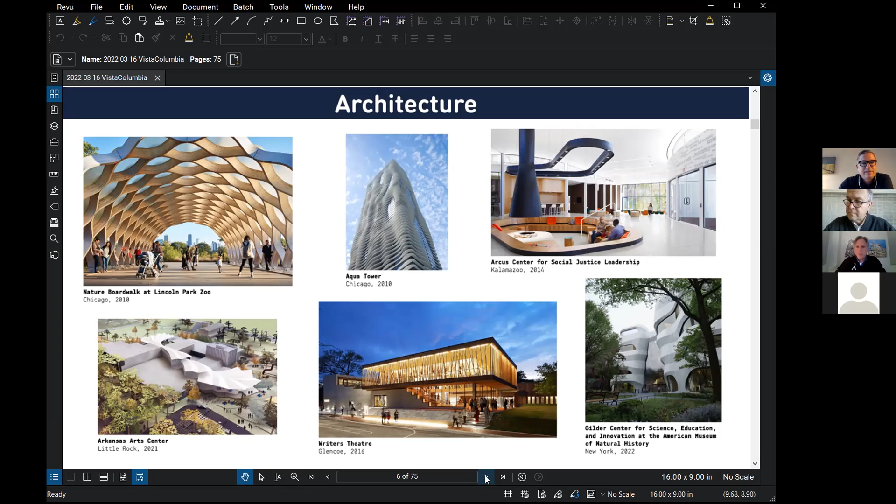And that actually has led to a couple of follow-up projects, such as the Tom Lee Park, which we're working on. And then there's a couple of other architectural projects that some other name firms are working on now that were spurred by those efforts.

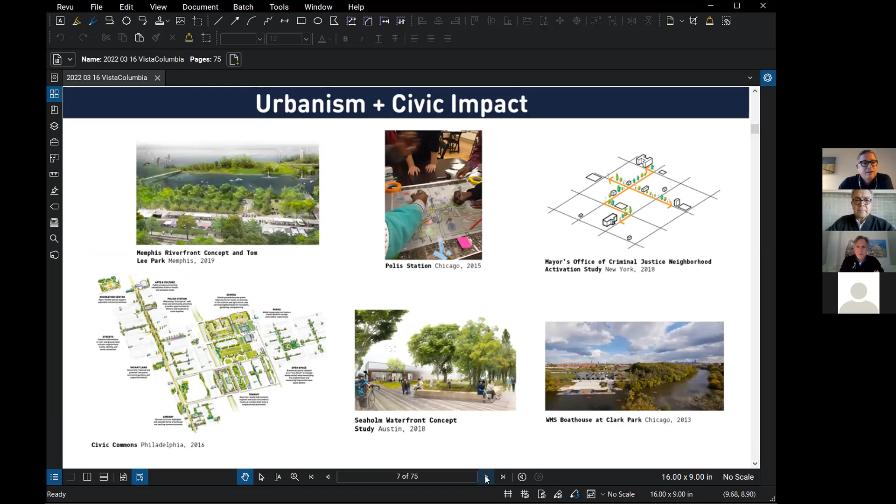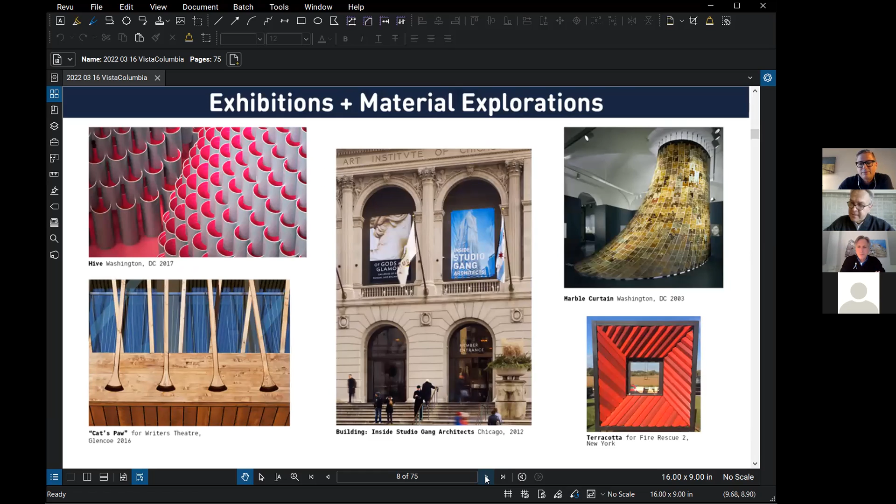And you can see, you might recognize that image on the lower right there, Rick. That's the project that we worked on with you, and some interesting exploration of the terracotta there. Beyond us, we were design lead on the project, but as you can imagine, a project with, I think, 2 million square feet and the height and size that I mentioned before takes a village.

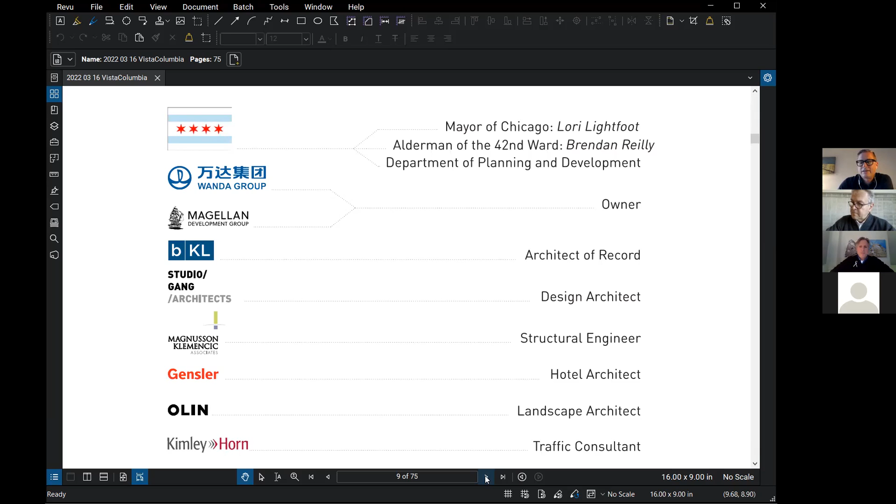There's a lot of people on the team, all of them certainly not even mentioned here, but you can see it's even 3 different architecture firms that were involved here. So lots of coordination, and also feels a little bit like a Chicago thing, is this collaborativeness.

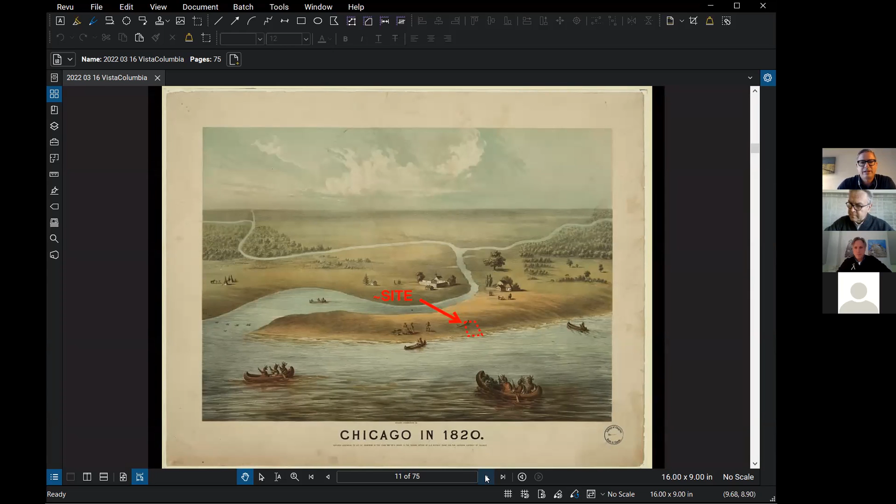All right, diving into the site, it's a very historic site. As you can see, this is about the first depiction of anything in the Chicago area in 1820. Jean-Baptiste DuSable was the first settler, and he didn't know, but our site was pretty close to where he started the entire city, which of course is based around location on the lake and on the river.

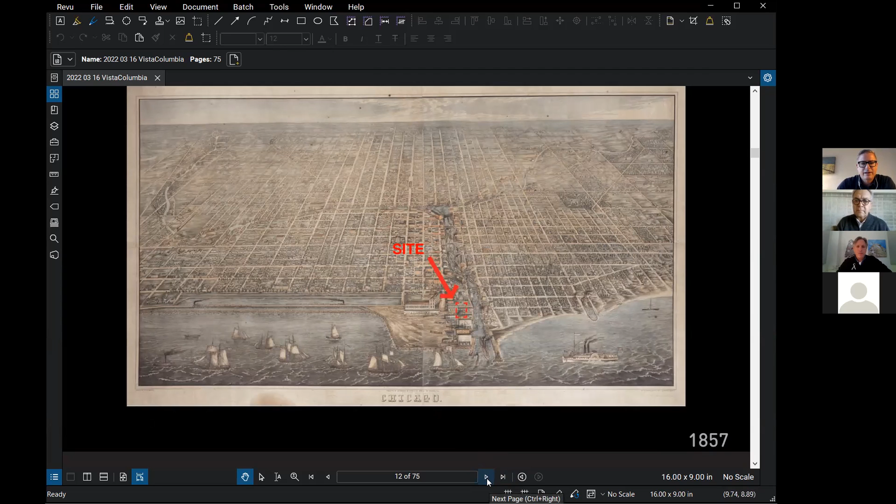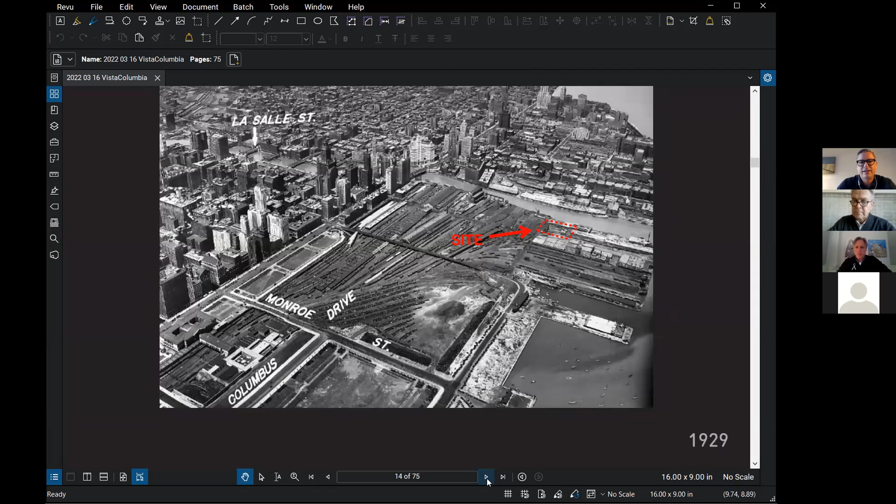In 1929, the site is now no longer as surrounded by boats. Now trains have taken the reins, if you will. Everything here is infrastructure, and that was the case for a long time in Chicago on the lakefront.

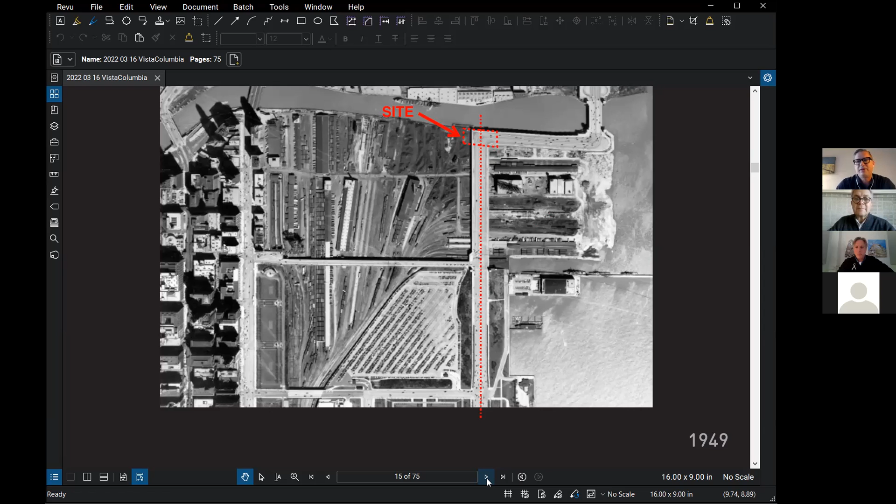And in 1993, that was rerouted, which, when the excavations were happening on site, we were still finding some boulders from that street, and we had to even work around some of them. But what the rerouting also did is, along with a lot of that infrastructural land in the vicinity that's now turned into parks, as you can see on the left, our site was now united and ready for redevelopment.

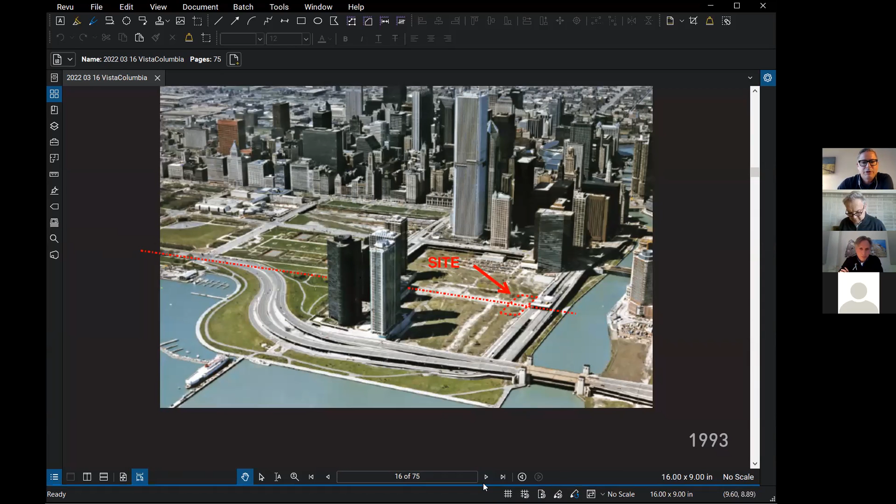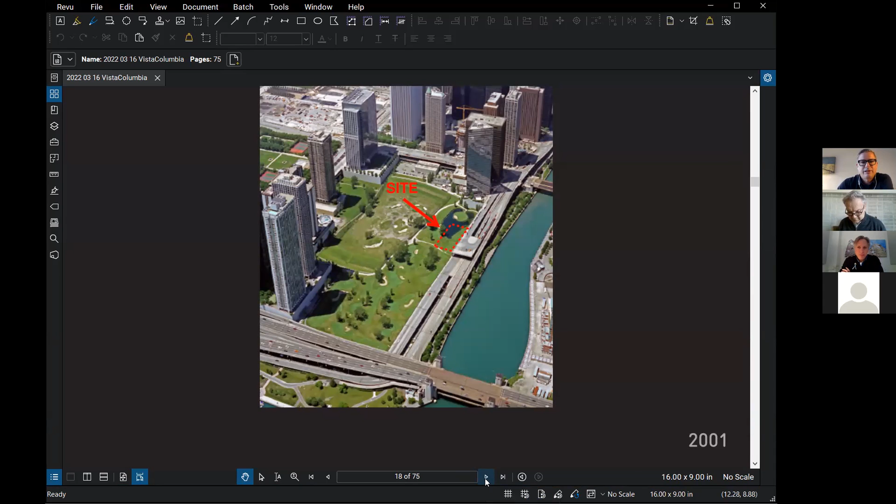For a couple of short years before development really kicked in, this site turned into a golf course, and I'm told that that's for tax reasons. But then in 2003, construction really began.

The development overall still has a lot of parts left. You can see towards the lake, there's still a lot of construction happening today, but it's a really nice community.

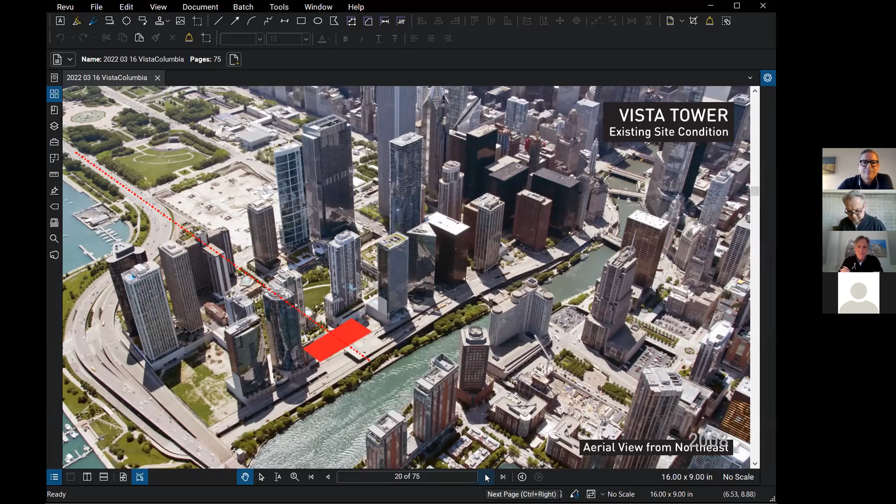A couple of topics I wanted to talk about: the design, quickly about the tower geometry, which is about how we develop the shape, and then the urban component, city connectivity, about how the building becomes a good neighbor. And then a little about the facade materiality, the quest for the look and materiality to get right.

Tower geometry - this is how we start a project, lots of iteration, but some themes really stuck right from the beginning. There's this idea of splitting the tower into 3 pieces in order to make room, lift the center part up, and let the city flow through below. And also this idea of modularity, which I'll touch on a bit more.

In terms of overall strategy, how we tackled a building of this magnitude to make sure it doesn't overwhelm visually and the way it touches the ground - I think a big component of that was modularity, and there are several ways of stepping the massing.

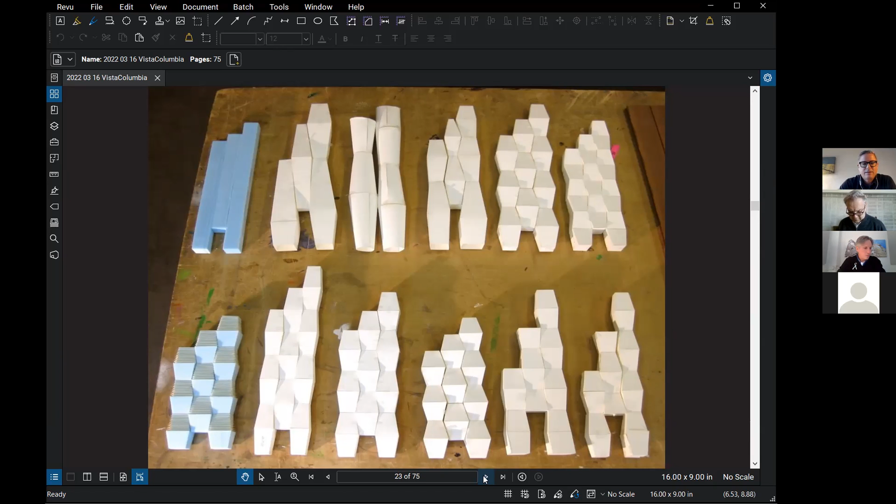Something we really like about this building is that while it has a really sinuous feel when you look at it from a distance, there's actually no curve in the massing, and only very few conditions where the structure isn't completely vertical. So stepping these columns is one way of doing that - stepping the facade by 5 inches in and out per floor for 12 floors, then reversing, was the way to create this dynamic from a facade point of view.

The basic building module is a geometric shape called a frustum, essentially a cut-off pyramid. This module can be flipped and stacked, creating what we call a stem - there are 3 stems here. Placed next to each other, they nest seamlessly, making the overall volume feel assembled as opposed to monolithic. That was important - it's not about designing an iconic shape, but almost like a brick wall, assembling this massing out of individual pieces.

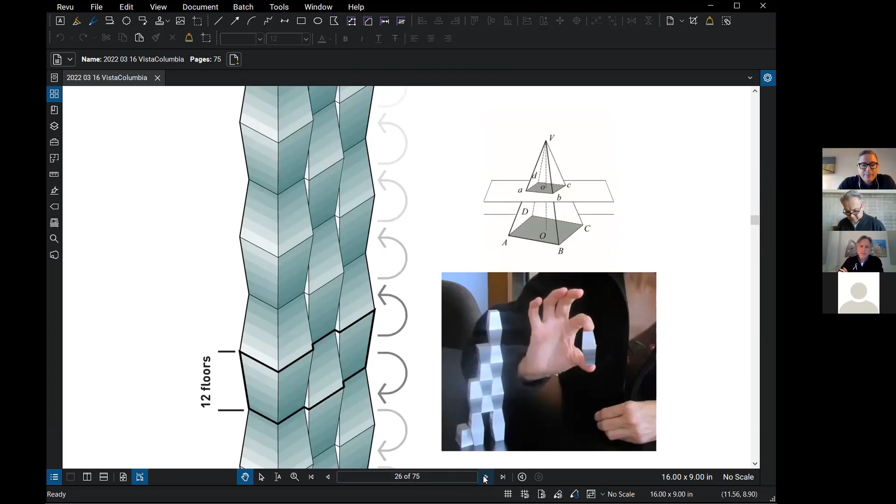Another advantage of this more dynamic massing is that the undulating edge limits wind forces that would otherwise occur. The second stepping move is stepping over height. The stems drop off towards the lake, creating a really slender top, which gives the tower its unique identity in the skyline. This move also provides a minimal top-tier floor plate.

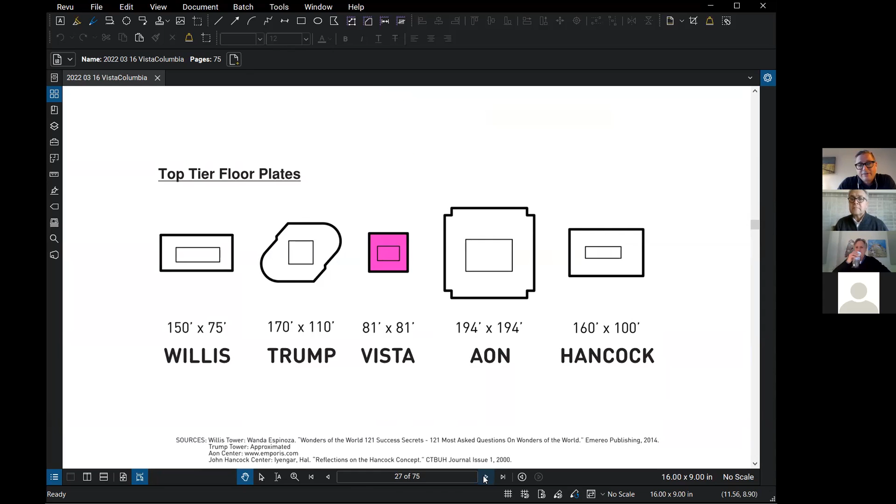You can see that here in comparison to some of the other classic Chicago towers. One effect of that is it minimizes the shadow cast on surrounding neighborhoods, which is just the kind thing to do in an urban context.

The stepping stems also provide terraces used as amenity spaces facing the lake, with interior amenity floors associated on the same level. The lowest one here is used by the hotel - I'll talk about the program in the building a bit later. The middle terrace is a condo amenity floor, and the top one is actually private, so somebody has the highest outdoor pool in Chicago on that level.

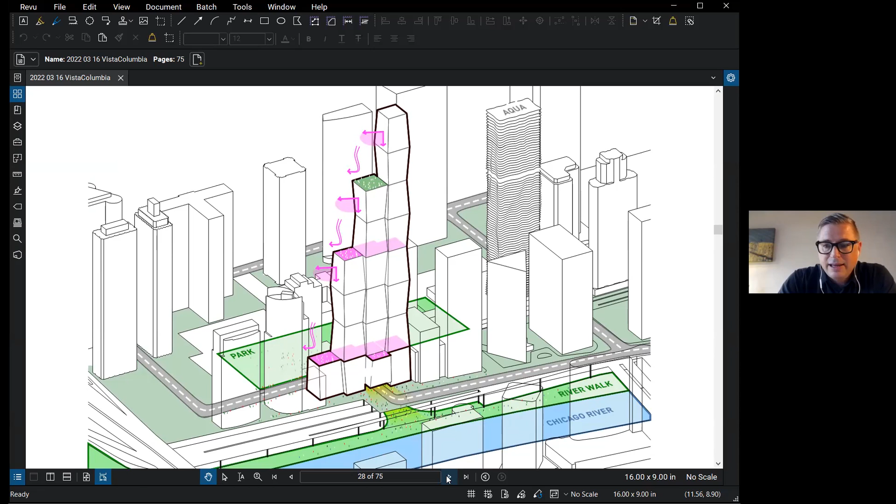The third stepping move is stepping in plan, done to further break down the volume by more clearly distinguishing the three stems, and it also makes the building adjust better to the site. Lake Shore Drive north has the angle of the river there, and that move adheres to that geometry, but it also creates two plazas - the residential entry on the southwest side and the hotel entry drop-off on the northeast side.

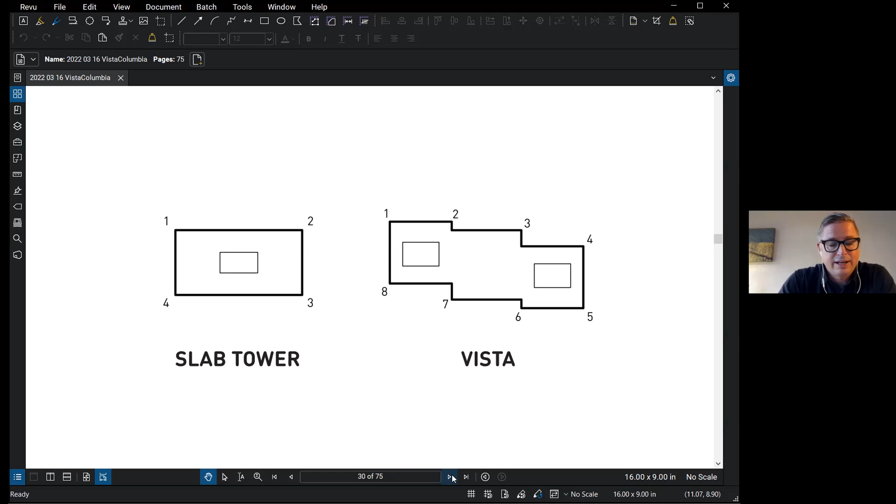That kind of stepping also creates more corners, which is obviously attractive. The more corners you can have, the more corner units you can have, and the more high quality units you get.

A couple words on city connectivity. What we asked ourselves, as I've mentioned before, is how can a tower like this, of this scale, be a good neighbor? And of course, the way it touches the ground is essential for that.

In this case, if you know the area, this happens to be a place with several levels along Lake Shore Drive - upper, lower, and sub Lake Shore Drive - that historically had different roles: a delivery level, a car drive level, and a pedestrian level.

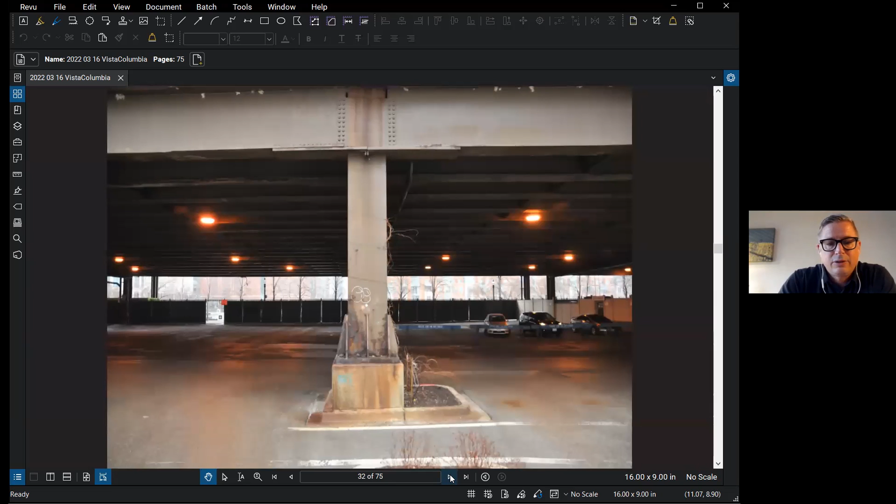The lowest level, sub Wacker here, isn't very attractive, but it has a lot of potential because you can see that tiny little hole back there connects directly to the Riverwalk.

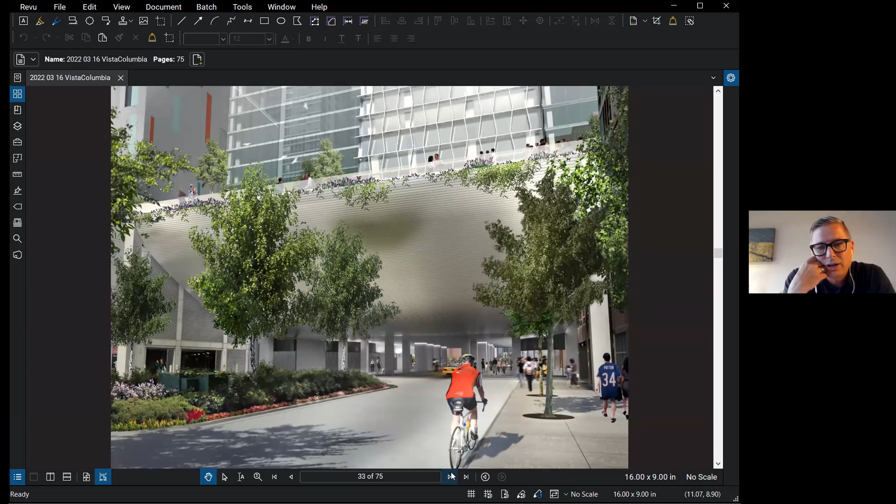So step one to improve that part of town was to make that connection, really putting effort into it from a design point of view, which meant activating the sides of the walls, adding generous lighting, and creating this inviting gesture at the top with a plaza where views toward the building and the park can be had.

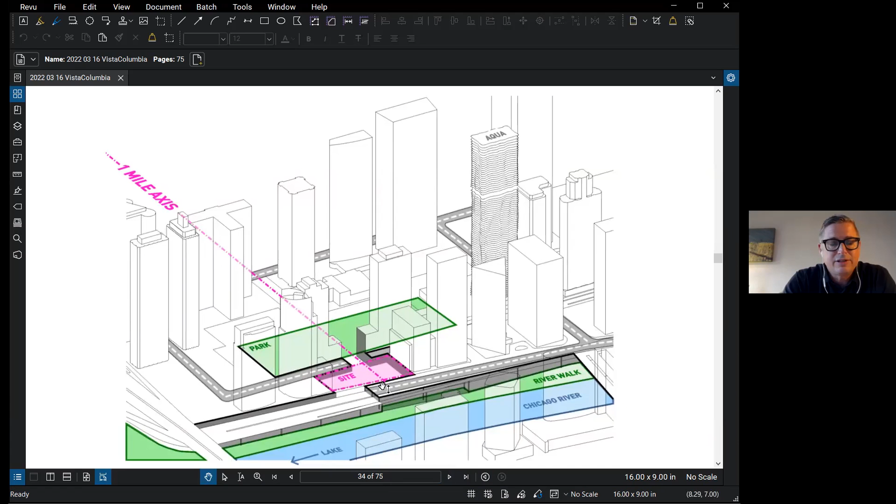The second connectivity is on Upper Wacker, where the project provides basically the missing puzzle piece of the city fabric by completing the neighborhood ring road. The condition before was literally just a missing piece of road with two or three dead ends. That's now been connected.

I actually drove that road a couple of days ago, and it's really exciting to have that ring road completed. It's an advantage for pretty much all of the residents, not just of our building.

That's a view of the plaza with the residential entry in the background, and you can see the connection under the building, under the middle stem, through to the other side.

An initial thought was that none of the structure in that area would come down. It proved quite challenging, but we still managed to keep that area free from cores and consolidate the structure coming down significantly. So while there are some columns, it was quite a feat to limit it to the ones that we have here.

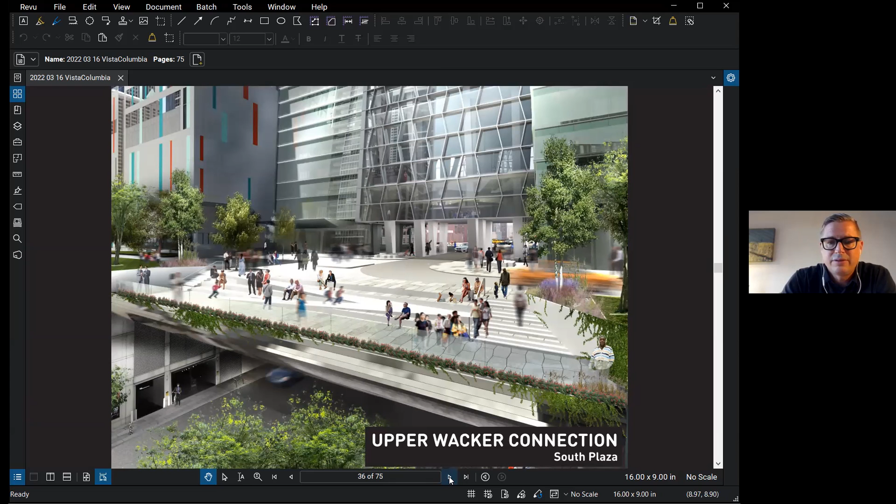On the other side, you can see the entry to the hotel on the lower right, where that light is emanating from. Again, the significance of this site right at the mouth of the river, with Navy Pier in the background.

Moving on to facade materiality, an early idea was to find a new and interesting way of using glass. We were inspired by the beautiful and varied colors of Lake Michigan, but also wanted the color of the glass to increase the dynamic of the geometric shape.

You can see that a little bit here, where the wider floors have a brighter glass and the deeper floors have this darker glass. So the challenge we set for ourselves was to find glass with this consistent change of color, resulting in a perfect gradient matching the beautiful lake blue of Lake Michigan.

We also wanted the glass to be readily available on the market to control cost. There's a lot you can do with coating glass, but that quickly gets challenging on the cost front, especially since projects of this size always have these kinds of cost pressures.

Unfortunately, we found out the hard way that glass was generally simply not made that way. If you've ever tried finding three or four colors that work together, you know that's hard. But finding a smooth gradient of six colors, especially under the changing light and reflection conditions on the project, was essentially impossible.

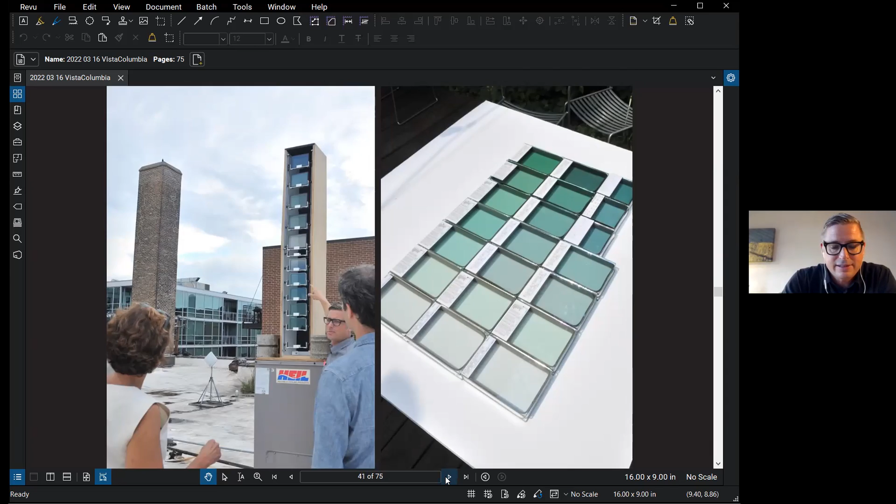Days before the final decision, a new technology showed up on our doorstep. I don't even exactly remember how we found out about it, maybe a rep reaching out because everybody knew we were looking. This product was called Coating on Demand, which promised we could fine-tune glass colors and performance in near infinite increments at a competitive cost, with samples available almost immediately.

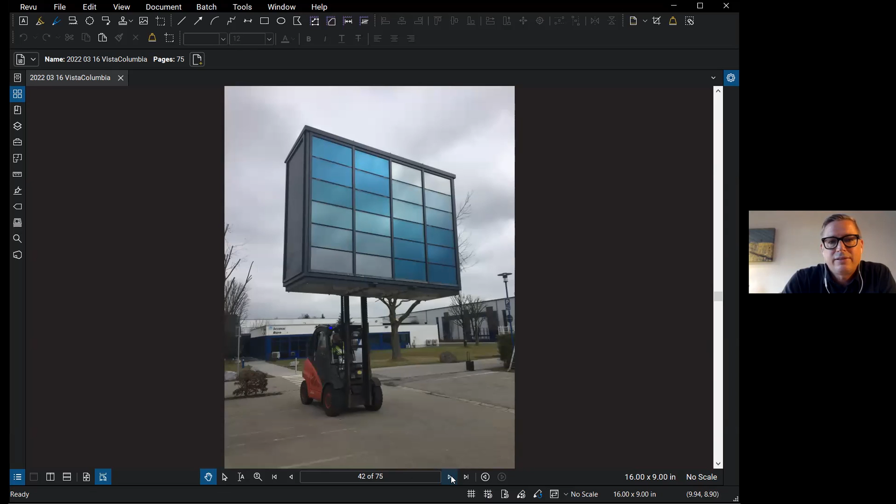This was really a super exciting achievement, and you can imagine we were thrilled that we found this level of progress just in time.

Here's another image of what it looks like today. You can see what I've been talking about before, that view corridor along the southern axis of Lake Shore Drive, and we believe this is a really beautiful color for the facade.

So that's about the design.

A little bit more on the program, since we've got plenty of time, and some other technical facts about the building.

It's got about 400 residential units and 200 hotel rooms. The hotel is on the lower 12 floors, indicated in this blue color here.

Below level 1, there are 5 parking levels, but they are above ground. That's the reason level 1 is up there, as I mentioned earlier. There's 3 levels of city surrounding us here.

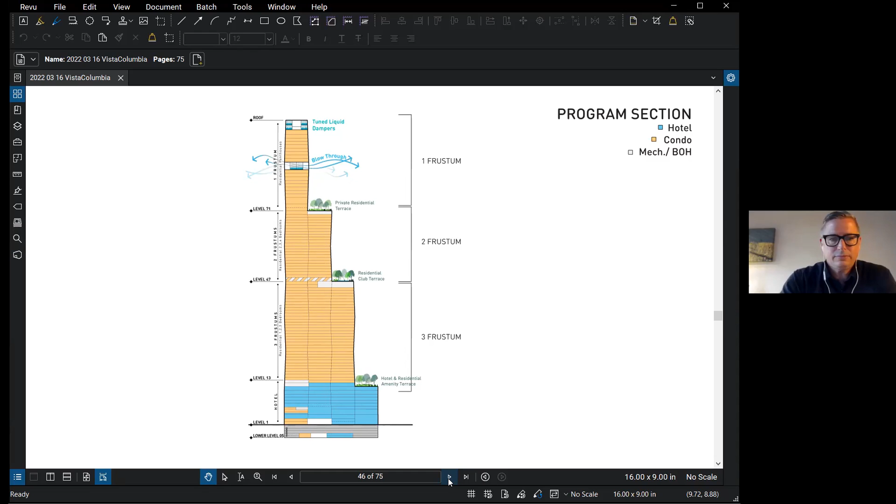Going through the tiers, the condo tiers here, you can see on level 13 through 46 we've got a total of 9 condos.

That's the basic layout. You can see they vary from 1 to 3 bedrooms. Some of them are also designed so they can be combined, though that happens a bit more in the upper tiers. The higher you go, of course, the more the cost increases.

One of the other interesting challenges of a stepping building like this is that we have to step the egress stairs going from one stem to the next, in order to make sure we have our required 2 egress paths.

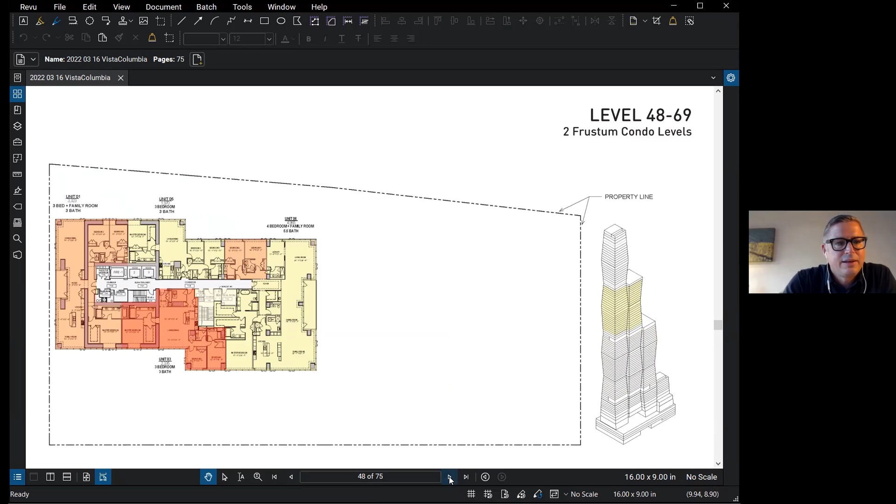The top floors, for those so inclined, are all penthouses, 12 of them. Those can also be combined, and I'm not 100% sure, but if anybody's interested we can probably put you in touch with the sales crew on those.

The amenity floor has all kinds of really luxurious amenities, including various lounges, a theater, a gym, an outdoor deck, a kitchen or demonstration kitchen, things like that.

And then, notably, the deck with a pool. From what I'm told, this is already getting some pretty good use.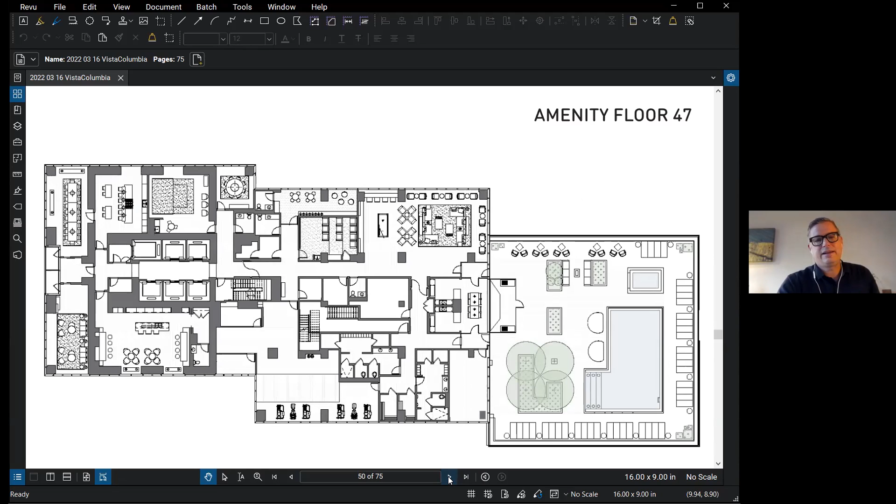A couple of highlights on the structure — just a very diagrammatic image of how the stepping was done. You can see this is a section through a column.

So the lower part here is the column of the lower floor. Then we've got the slab stretching across, and this 5-inch offset of the column above.

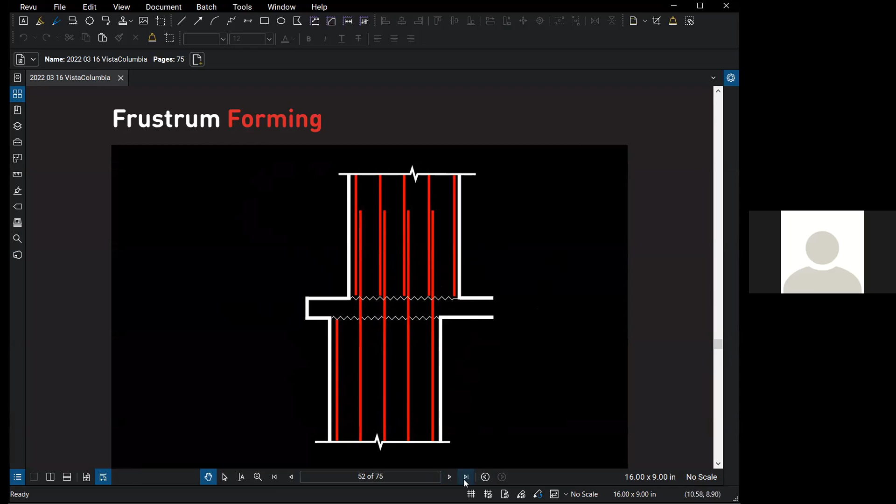The way that is structurally done — probably not a surprise for y'all being in construction management — is that a significant part of the rebar is overlapping here, and that's how we get the structural efficiency.

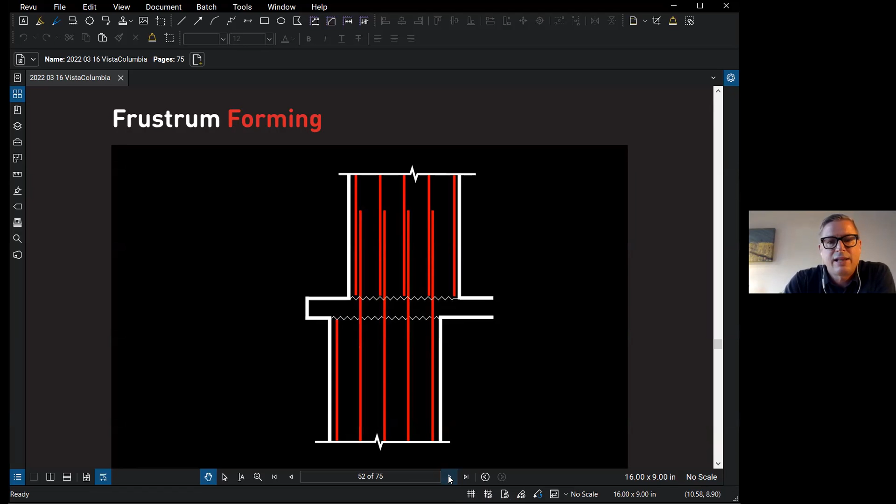This is also an efficiency for the whole construction process, because dealing with any angled part of the structure is always an extra challenge and a premium. So this was almost cost neutral compared to a regular straight-up structure.

Again, here is that connection wall on the center tier of the building's column that provides lateral stability between the cores, and also allows us to avoid having a core in the center for the street coming through below.

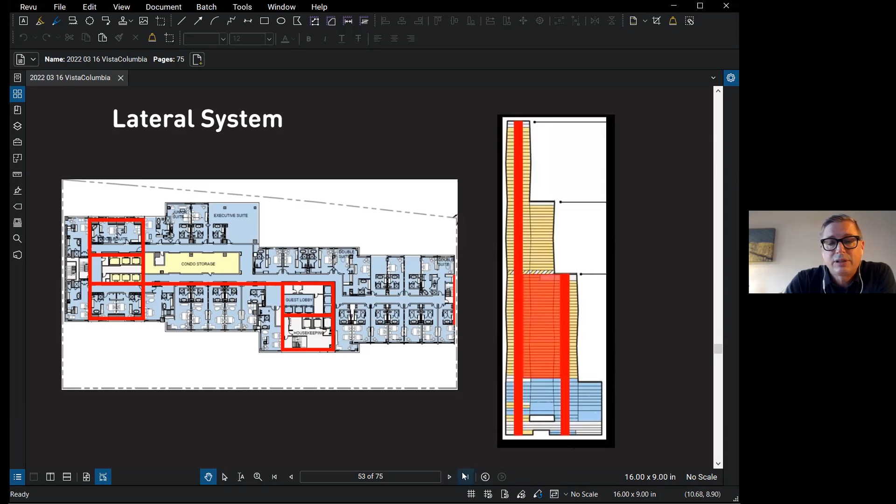However, in the process — and this is also something that always happens in a design process — we had to make adjustments.

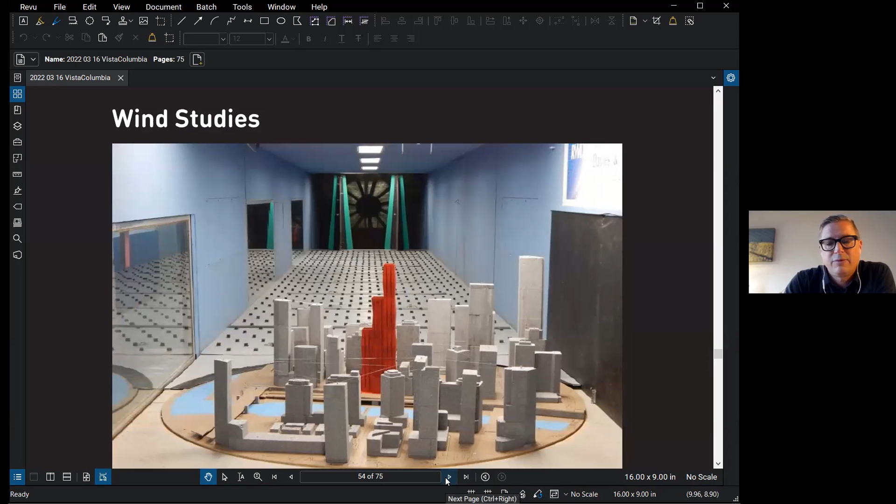We had the building in the wind tunnel very early, and it was performing really well because, as I mentioned, the edges of the building are very animated, which avoids vortices. I have a slide for that as well.

But when we came back after some design progress, the difference between the widest and narrowest floor had to change a little, due to efficiency and layout challenges.

The dynamic of these edges was limited, and it turned out that the building, while still fully structurally stable, had too much sway.

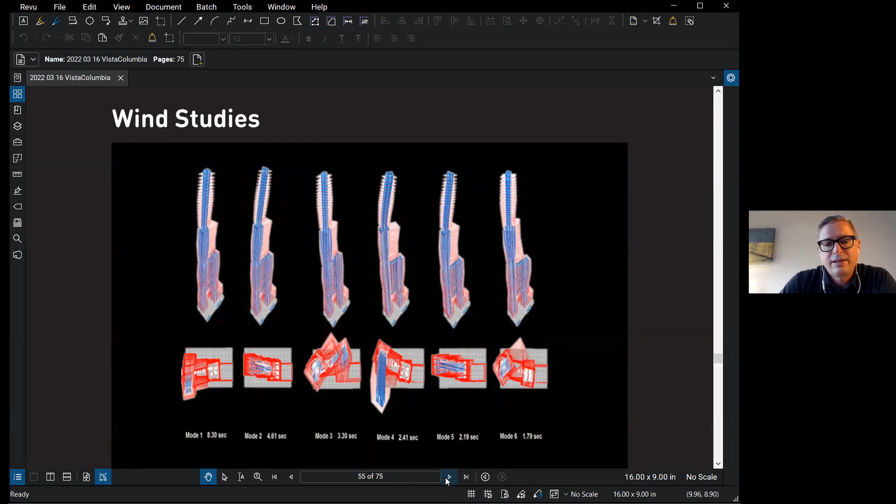So in order to tackle that — here's my slide showing that winds coming from the side are not a structural challenge, but what they do is create vortices on the corners.

They create a cross sway, and that's what gets into the area where comfort levels for users are challenged. So that's something that was happening in the model.

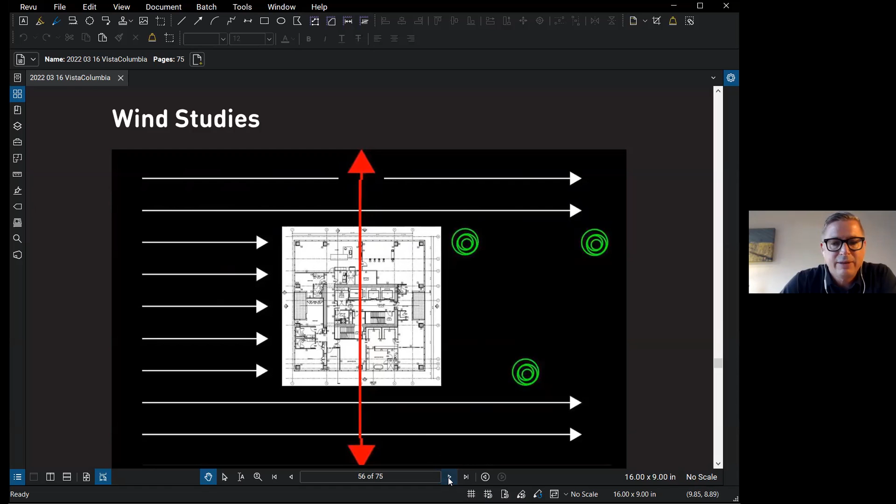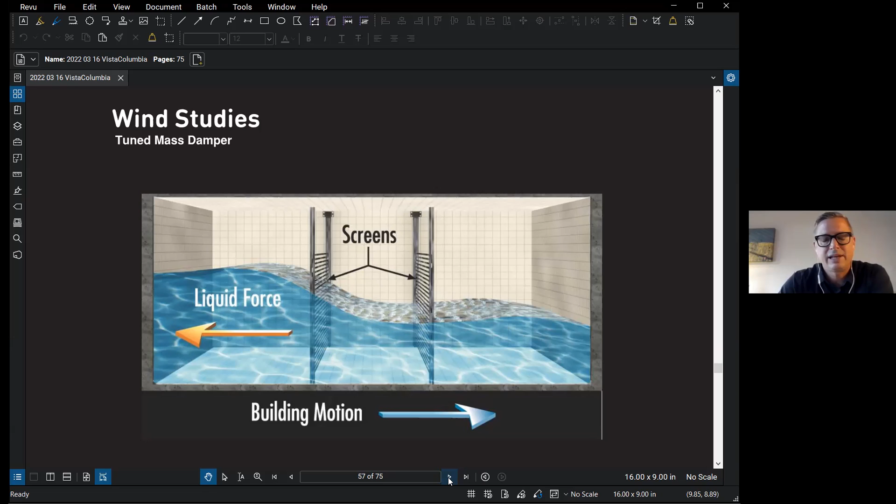So what we have on top of the building, in order to counteract that, are a couple of tuned mass dampers — essentially big volumes of water that move slower than the building and balance out the movement.

And then we also introduced the first flow-through floor in Chicago. I know there are a couple of buildings in New York that feature a similar technique.

What that does is, A, it interrupts the vortices coming down, and B, it provides an opportunity for some of the wind to go through right where the cantilever force on the building would be the maximum.

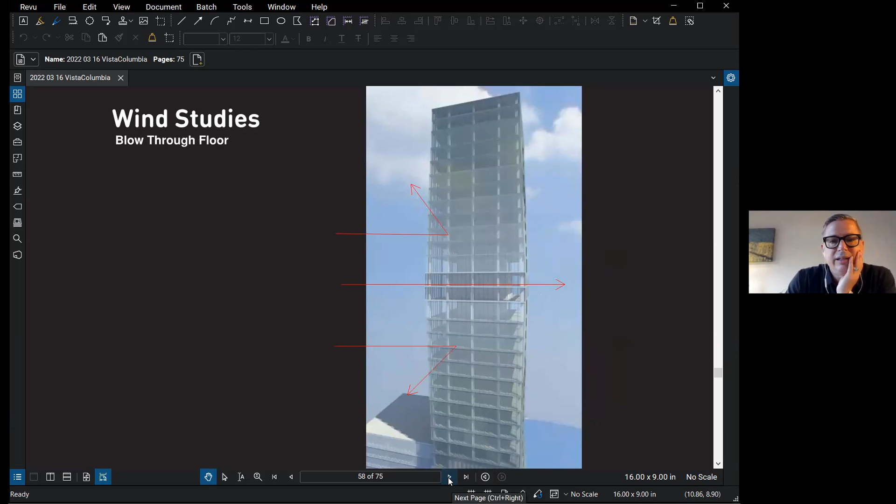So this is a really interesting opportunity structurally to basically ease the pressure on the building significantly.

Another sort of special moment in the building - I said there aren't any leaning columns, and that's not totally true. There's a couple of them, and that's for this volume at the bottom that we're calling the cube. It's consolidating, supporting this volume that's taken out on one side without adding columns below.

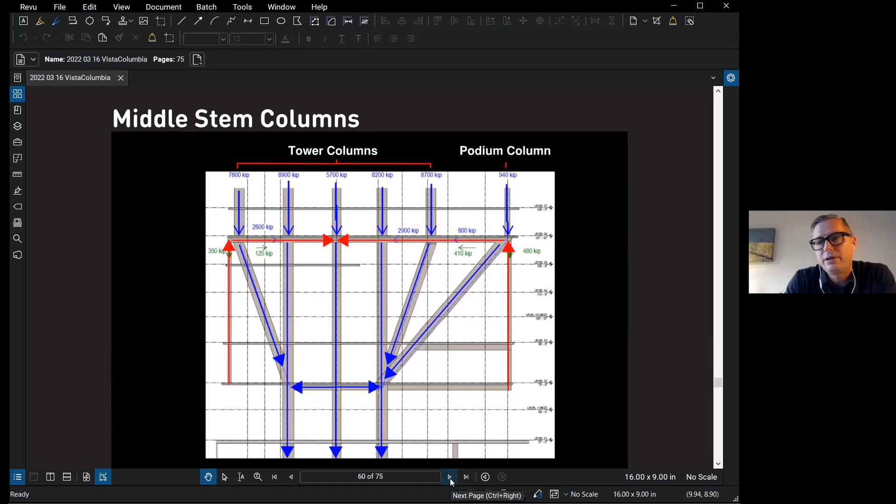You can see the column reaching out all the way to the right here - that's actually supporting the slab of that volume, and then the slabs below that are hung from above. You can also tell that some of the tower columns are being consolidated into just 3 columns coming through that street area, which is no simple feat for a building with 70 floors above.

A lot of exploration happening in the below-ground area here, because there are some historic tunnels, and the drilling machines can't get to some of the rails that are in those. So that's always an interesting part of putting the schedule together.

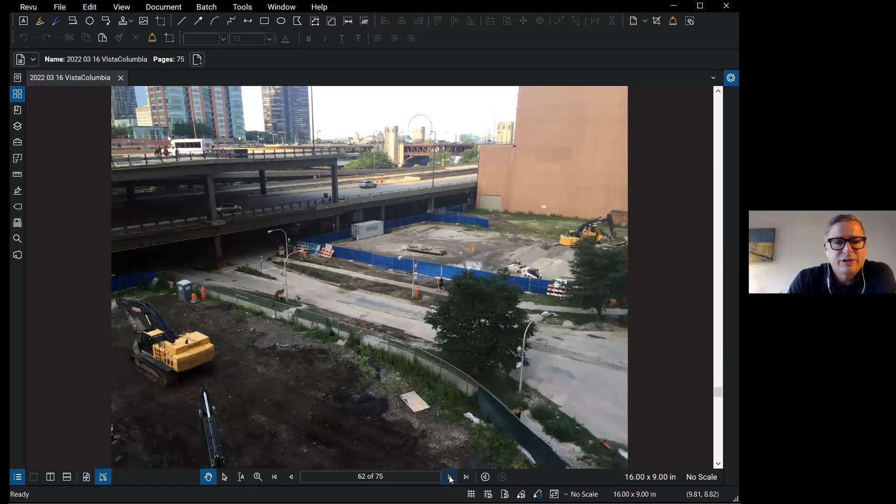Then the caissons are being poured. You can just see the scale of those - they go down 115 feet. I forget now exactly how many of those we have.

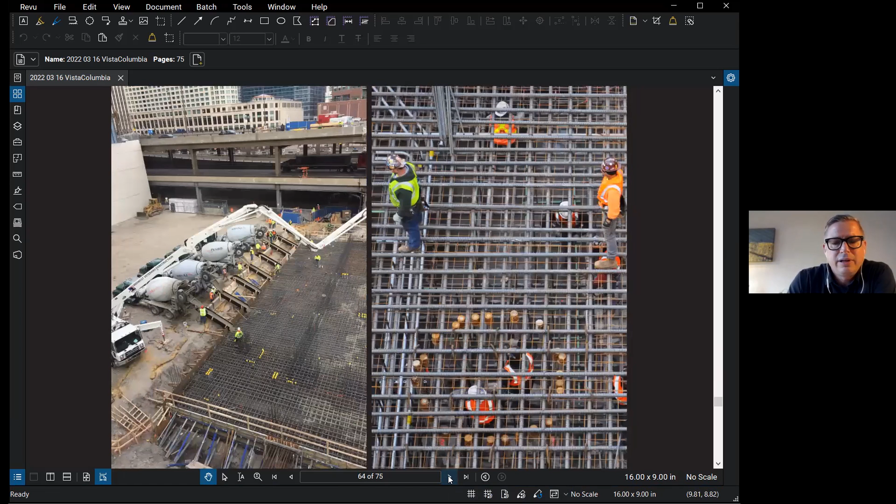And then they're bound together by an 8 to 10 foot thick mat slab that took, I think, 24 hours to pour. There were hundreds of trucks lined up all day to get that thing poured - always a super exciting moment in the construction process. You can see the scale of that by virtue of people literally walking around in those rebar cages.

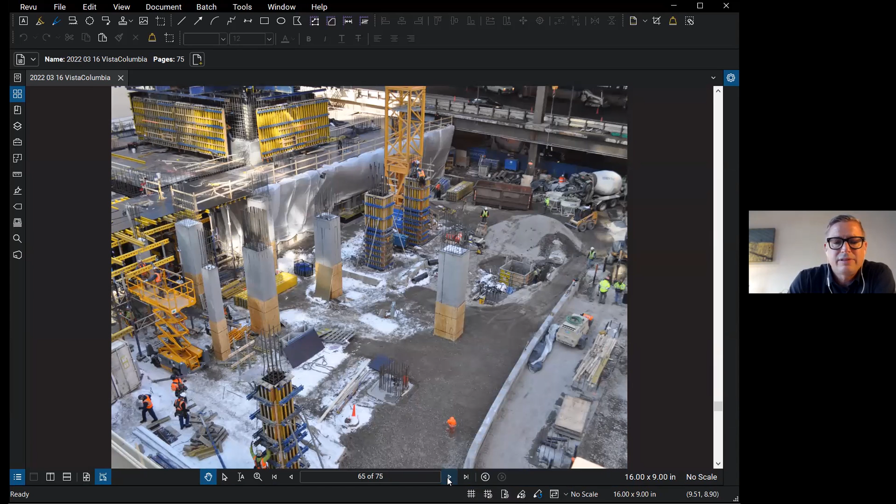Then you can see, again, there's no basement in this building, so the columns are coming out of the ground here, and on the left you can see the core. And then we've got the slabs coming in - this is the slightly more complicated pouring of those few angling columns that then support the slabs below and above.

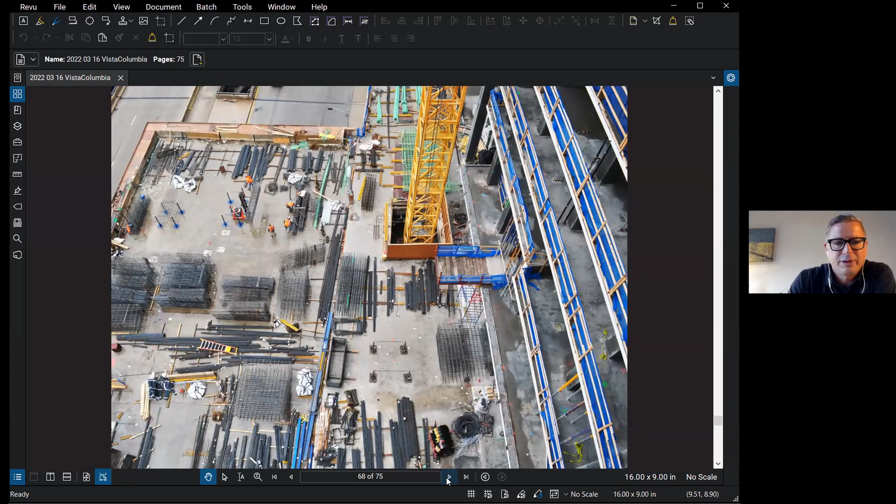This is an image just showing every scrap of space that was available in this relatively tight urban environment was used for staging. I think this is actually the roof of that lower volume, but we were also making use of any bit of that cul-de-sac road below to stage all this stuff.

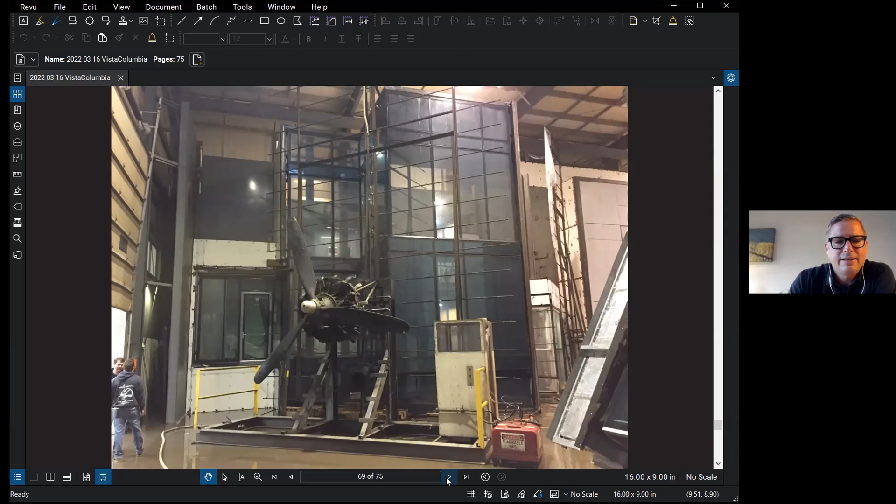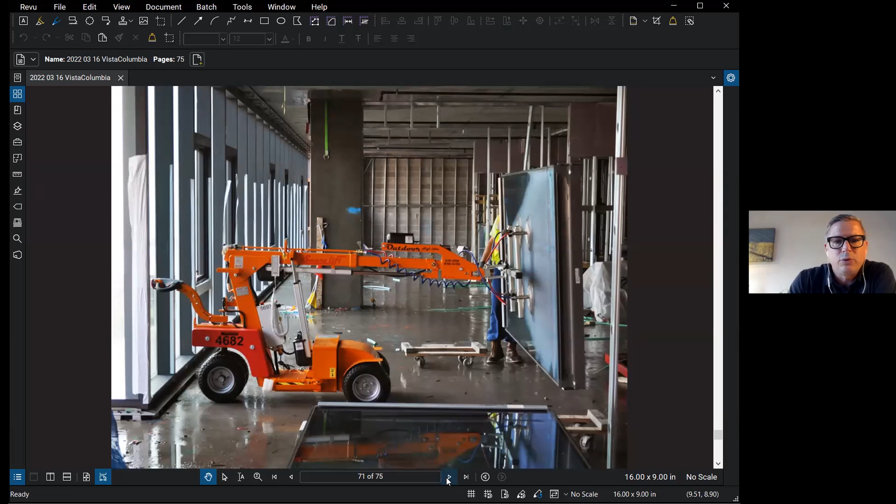And then step-by-step installing of the facade - you can see the slab edge covers went in first. It was a critical installation advantage to be able to install all of the glass from inside the building. They have this little special crane thing that sits on the floor, and then you can just move the panel to the facade where it can then be installed essentially by 2 people. So that's a lot of construction efficiency.

Also, these panels didn't have to be delivered by crane - they can come up through the hoist. So again, a lot of savings in scheduling time.

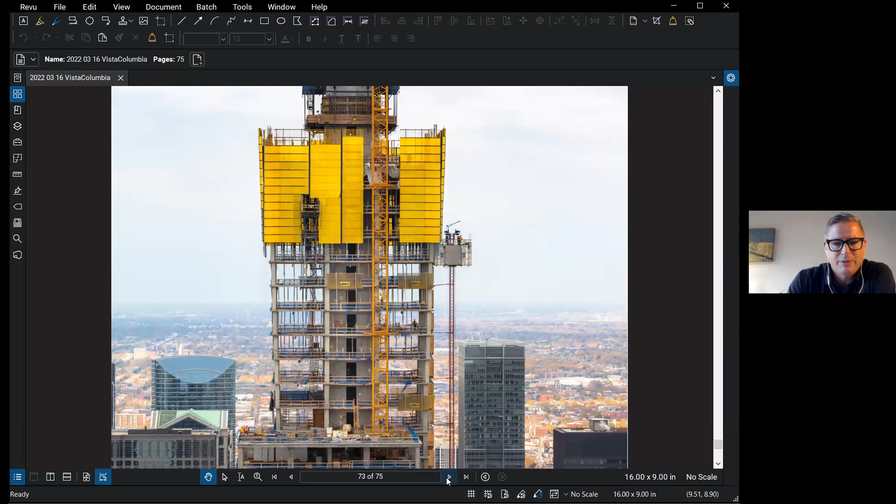And here we're at the part of the building that is just a single stem, so almost at the top. And then topping out. And that's it.

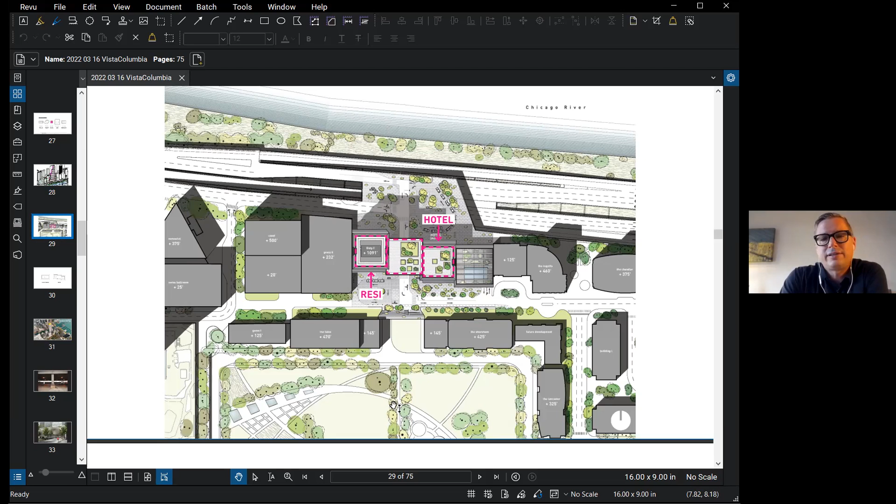Yeah, it's a complex question. So I'll say that some things I think are working well, and I can point those out. There are other things that were aspirations during the concept that we are still hoping to achieve at some point. But I think one thing that worked in our favor is that this road, which was basically in the master plan, is privately owned but is a publicly accessible street that you can drive down. Thankfully, it's also a very slow speed kind of road, so there's a real emphasis on pedestrian traffic. A lot of the infrastructure and circulation around here is pedestrian only, like this connection here. There's a significant amount of pedestrian traffic because, as you can tell, all of these buildings around here, with the exception of the Swissotel over here, are residential. So it's a really busy community, a civic, urban feeling area, and there's a lot of traffic. With this public road coming through here, that ensures that nobody's putting a fence around this area.

It's not the only part of this, it's really continuing and completing a network of circulation. So that was working in our favor.

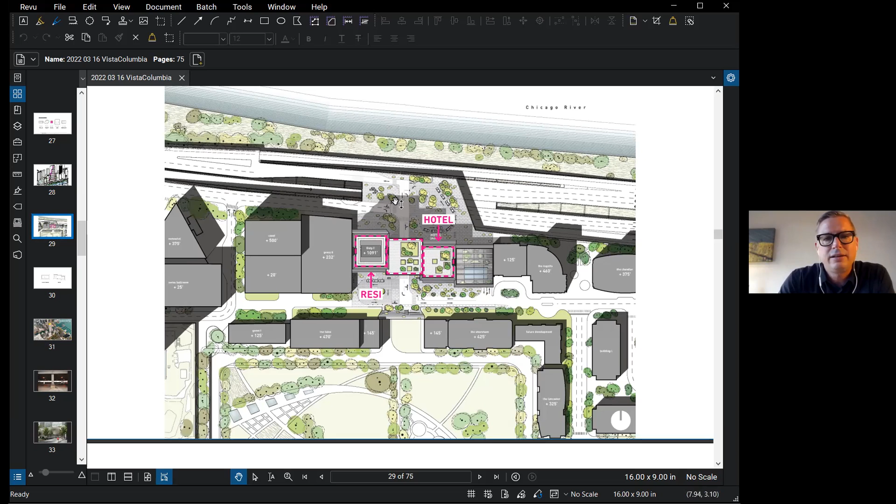On the hotel side, this used to be a dead end with a construction trailer sitting on it for decades before this project came along, and it's still under construction because the hotel hasn't moved in and opened yet. But it will be a plaza from which it won't feel like a complete dead end anymore, because there's a pedestrian connection leading to another whole series of towers sitting a little further towards the lake. This will be a main pedestrian connection as well.

I think it's fitting into the urban context as tightly as we've done here that really helped that. One thing that worked out nicely is the little plaza moment overlooking the park below. I think that helps further activate it and makes it a moment to even stay for a while up here, and creates a connection down to the park.

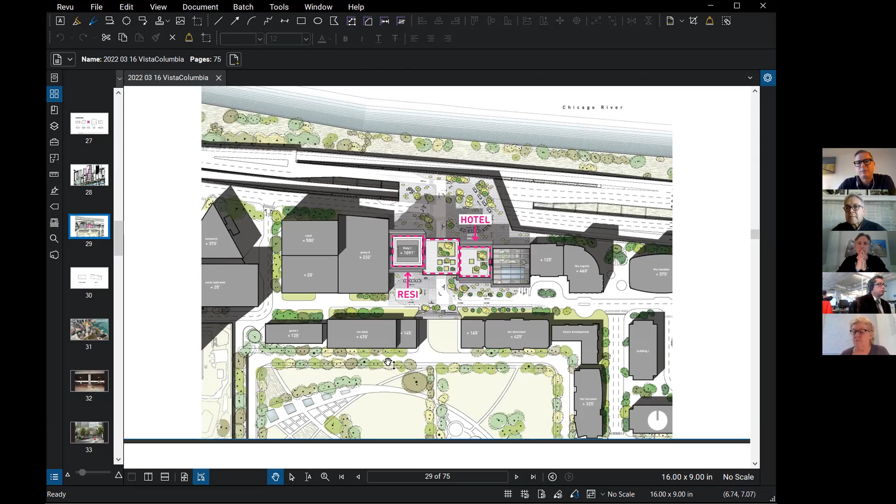In terms of physical connections down to the park, there is a public elevator, accessible independent of the functioning of the building, that you can use to get from this upper level to the park and river level. But two things that aspirationally are still a little bit lacking: there was an idea at some point to have an elevator on the river walk with the bridge across. That hasn't shaken out, probably for money reasons and maybe permit reasons.

In terms of the connection to the river walk, our design has done its part, as far as we can control that. Unfortunately, the connection beyond - this isn't a parking garage, this is Lakeshore Drive - is outside of our scope boundary. While we had various designs reaching further, including adding a dog park and a playground and things of that nature, those are only things we could pitch and propose, but they're otherwise out of our jurisdiction. I'm not totally aware what the latest thinking on that is.

What we've done is lay the groundwork, and the proximity is there, the adjacency is there, so hopefully the pressures - I think there's some more development that's going to happen on that part of the Riverwalk as well. Even if you ever actually make it to town, that is absolutely something you have to go through. It's an amazing urban amenity.

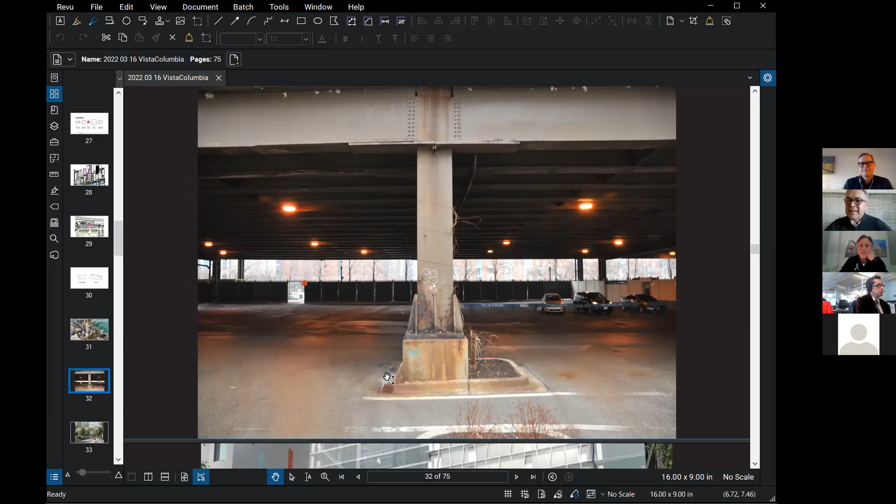I have two more questions, one of which may be a segue to Meredith and Gregg's participation, because it's about money, and I'll do the technical question first since it may be easier. The glass is phenomenal, and thank you for walking us through the decision-making process about the glass and showing the mock-ups.

I can talk about the company that provided the cladding, but I honestly don't know exactly where the glass was made, because there are several stages in the process of making it. But the significant process that really mattered to us happened in Germany.

It is quite amazing that in a globalized world like this, you still have to go around the globe for these kinds of things, and that it makes financial sense. The coating was applied at a company in Germany, but their research arm is in Belgium. Technical advancement and progress like this still takes a look around the world. Thankfully, this was all done before the supply chain issues really started happening, and for a project of this size, that was certainly also important for the manufacturer, even though they serve massive projects all around the world as well.